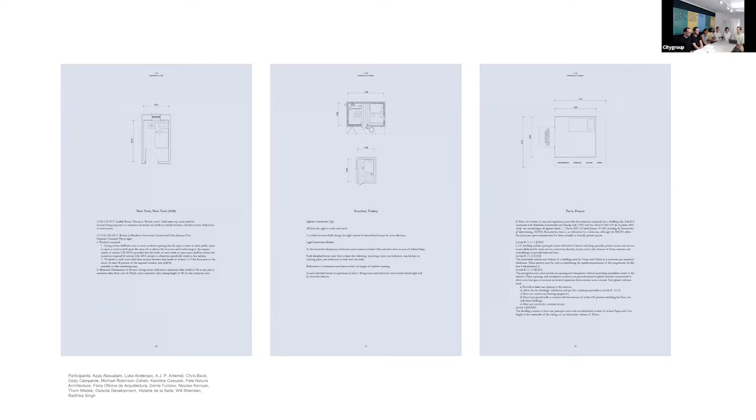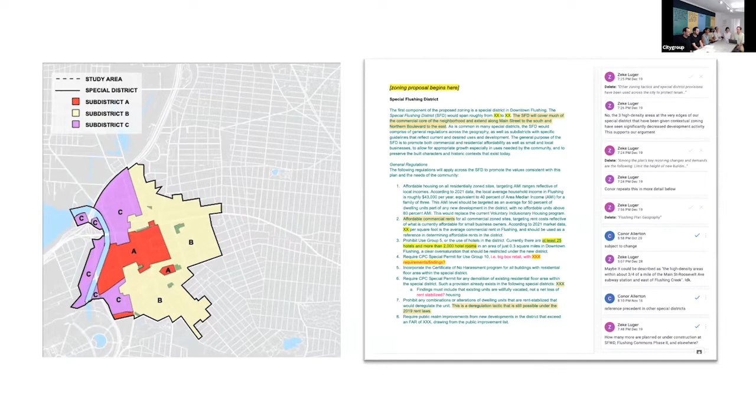The city can change the city's rules. So the question is: is the city an administrative apparatus, or is the city its mobilized residents? In an attempt to discourage speculative luxury development in Flushing, Queens, Citygroup is helping local organizations develop a rezoning plan, relying on contextual zoning to allow growth, increase affordable housing, retain manufacturing, and maintain the diversity of the neighborhood.

A city is where people draw close together for mutual defense and mutual aid. This sentiment underlies the Citygroup tradition of Circolo, a standing weekly meetup that takes place in our space or online during the pandemic. Open to anyone, Circolos are an evening to gather informally, eat dumplings from neighborhood establishments, and relax together, building up a network of conviviality and solidarity.

And in the spirit of solidarity, we organized a zoning teach-in as part of our advocacy for a community-led rezoning plan in Chinatown, where activists, residents, and politicians gather to discuss the alternative zoning proposal for a site where a luxury residential tower is currently under construction. An alternative sign was posted to the ubiquitous green fence to demonstrate the type of development that the community wants.

A city is a place for trading information quickly. Our bulletin extends the collective space beyond its interior and onto the street to engage with the public. Artists reflect on the Citygroup Manifesto and respond to the themes of the exhibition's inside by designing a piece to fit in the poster frame outside.

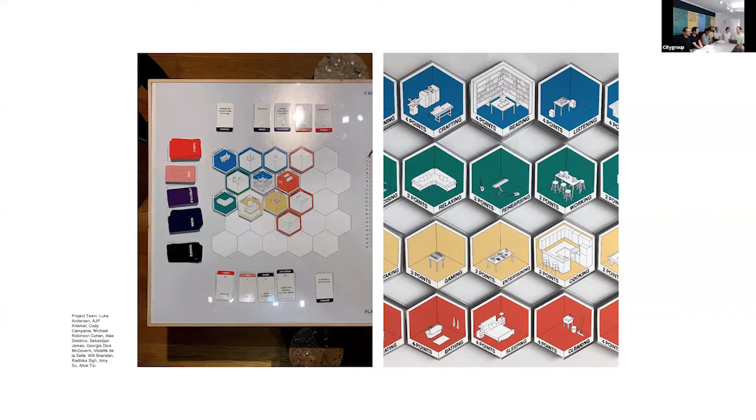A city is a collective experience where life is affected by others. The city is a space of negotiation. This is something we considered when creating a board game we exhibited at the Oslo Architecture Triennale in 2019, where two players negotiate a shared living arrangement. Considering its advantages and drawbacks, they work out the calculus to create a place for each to call home.

This collective negotiation also undergirds how we work together. Even making this lecture was a group discussion, an opportunity for us to collaborate on fonts and colors, but also the weightier questions we're posing to you all today.

The ground of the city is accessible to all. It is public. Public space creates places for people to meet and to assemble. This bench, based on the tete-a-tete or conversation chair, allows adjacent sitters to face opposite directions and converse. The form of this amenity aims to amplify discourse between city dwellers and to fortify the publicness of public space.

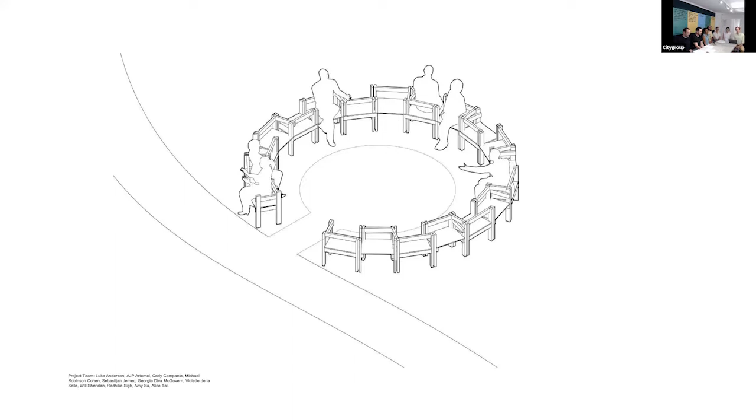Difference thrives in the city. Protecting economic and cultural differences in communities that are threatened by the monoculture of luxury development is why we are active members of the Chinatown Working Group, a coalition of organizations advocating for a community-led rezoning plan for Chinatown and the Lower East Side.

As part of the Chinatown Working Group, we created a series of analytic drawings and maps to identify sites that are vulnerable to overdevelopment and visualize the impact that both the current and community proposed zoning regulations would have on them.

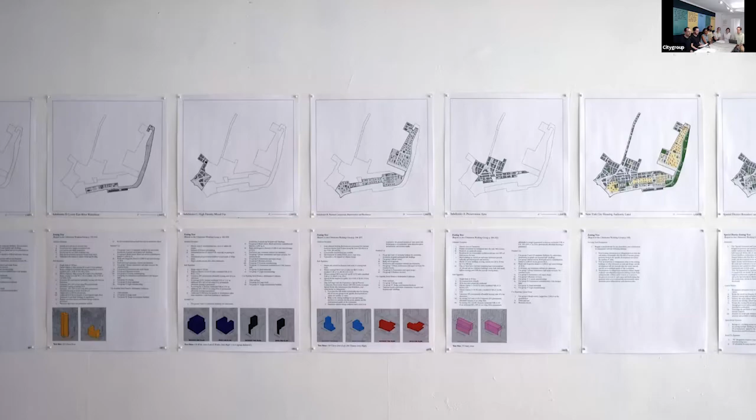For the exhibition Plan Unplanned, Ideas for an Affordable Chinatown, we invited architects and artists to make design proposals for a number of these sites to further explore the positive impact passing the community-led zoning would have on the neighborhood. This material was then used by the Chinatown Working Group and City Councilman Christopher Marte in their advocacy for zoning reform.

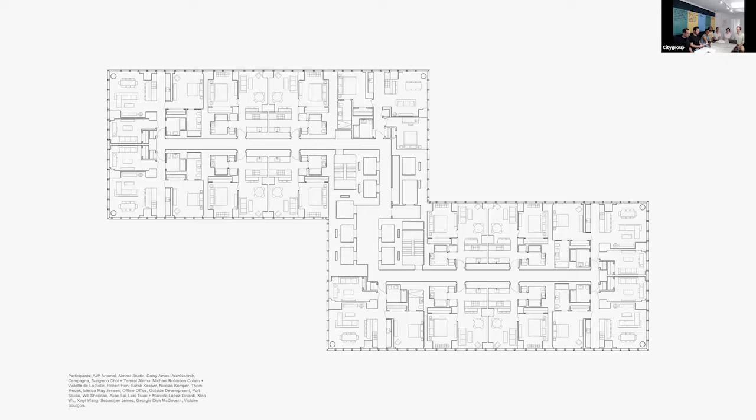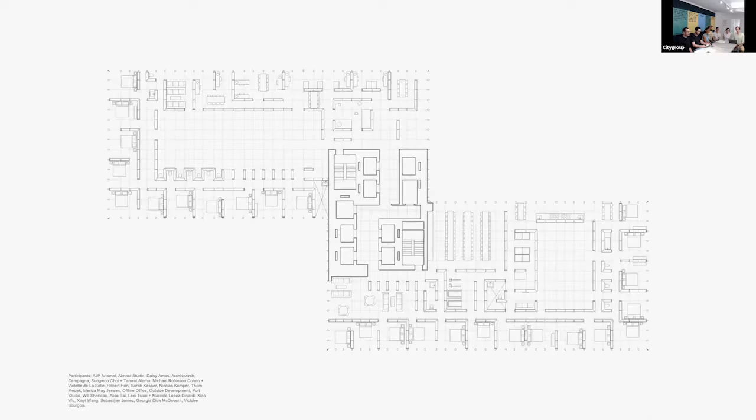Site 5 of the World Trade Center is the one parcel of the master plan left undeveloped, 20 years after 9/11, and it is the only site that will contain any residential units.

In strong opposition to the creation of taxpayer-financed luxury housing, and in support of the Coalition for a 100% affordable 5 World Trade Center, we worked with the New York Review of Architecture to invite designers to imagine an alternative, fully affordable vision for 5 World Trade Center. Given that this is publicly owned land and that we are experiencing the severe lack of affordable housing in downtown Manhattan, we view this effort as a crucial political and symbolic gesture.

And now we would like to conclude with our most recent project called Off the Fence. This is the project that we created for the Architectural League Prize 2022 exhibition. You can view this project and installation on the League website, and we've also recreated a fragment of this project behind us, as you can see in the space.

We feel that the two definitions of the city, the CITY and the CITI, come into close contact in this project.

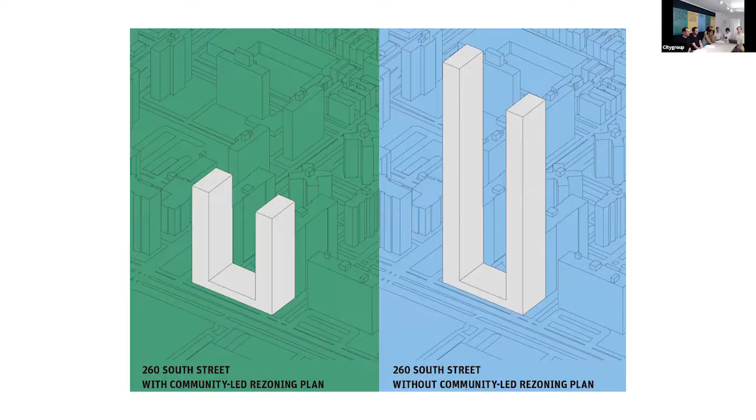Upon hearing about the construction of another luxury super tall tower on the Lower East Side's waterfront, neighborhood organizations held a walking tour to call attention to the imminent threat to the community. During this tour, we collected quotes from the attendees and from various media sources reporting on the issue. We then created multicolored posters with a selection of the quotes we had collected.

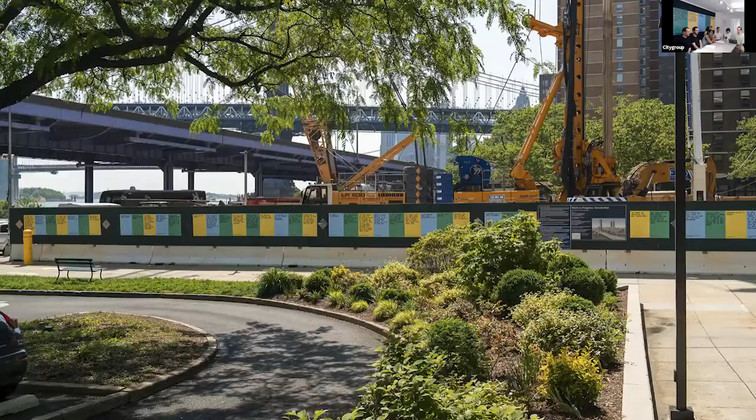The posters were then installed on the green construction fence that surrounds the site of the future tower. The posters manifest a discourse across their expanse and offer an opportunity to discuss what is possible for the future of the neighborhood.

A bench was an integral part of this installation, providing a vantage point from which to take in this text-based discussion, also offering the opportunity to strike up a conversation about it with a fellow onlooker.

But the posters were soon painted over by the developers who control the site. However, the posters and the quotes could not be fully erased.

The CITY can never be fully suppressed by the CITI. Ultimately, we see our work as a group, as architects and artists, as nourishing and fortifying the pockets of dissidence where the city with a Y pushes back against the city with an I.

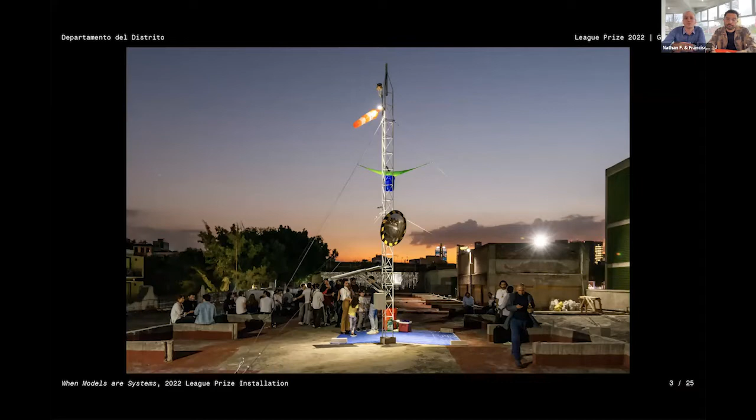For us, this really meant working with an exterior condition that was in constant flux, and importantly allowing us to engage with the politics of natural resource management and energy production in Mexico.

The rooftop as site was also of interest to us, particularly in relationship to the theme of grounding. It's a place where anonymous city infrastructures are located in elevated, unobstructed positions that facilitate our daily routines and connect us on the ground. So we documented communication towers throughout the city, fitted with electronic devices, transmitters, receivers, and power sources, and worked to reformulate these components toward a different end.

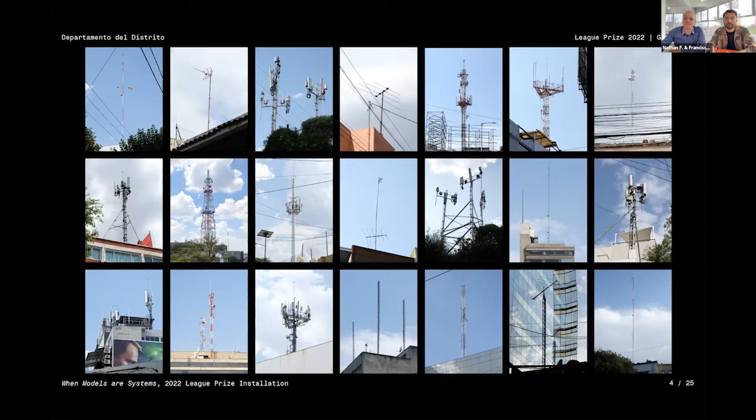So our tower plays host to an assemblage of devices that collectively measure, channel, and ultimately generate an exterior environment. Attached to a 7-meter tall tubular steel structure at varying heights, these devices ground electrical currents, measure humidity, collect rainwater, monitor wind flows, reflect light, and produce solar energy.

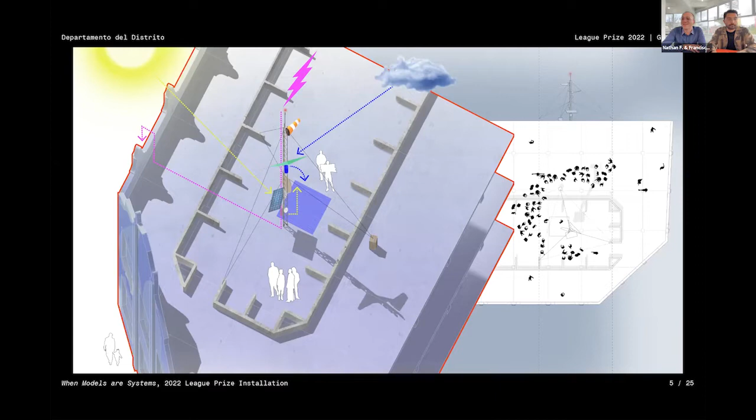This energy, in turn, powers integrated spotlights that illuminate the surrounding roof deck, loudspeakers synced to a playlist that's also featured on our installation page, and misters that cool the air, a temporal space where gathering is produced. Here we have some pictures from the installation, from the opening event.

So really what the installation is doing is plugging into existing social, environmental, and built systems on site. And so the installation is grounded to its context, both physically and operationally.

Taking advantage of the rainy season in Mexico City, which spans late May through November, the project is dependent on the periods of intense morning sunshine and afternoon thunderstorms that are typical during these months.

And in that way, when models are systems, it makes visible both the precarity and potential of Mexico's natural environment, which at the present moment is really being threatened by a renewed federal focus on hydrocarbon industries throughout the country.

And for us, this interest in systems stems directly from an approach to design that's based in program, in operation, in the construction of relationships, and in the ability to literally provide an abstract model or machine for future practice.

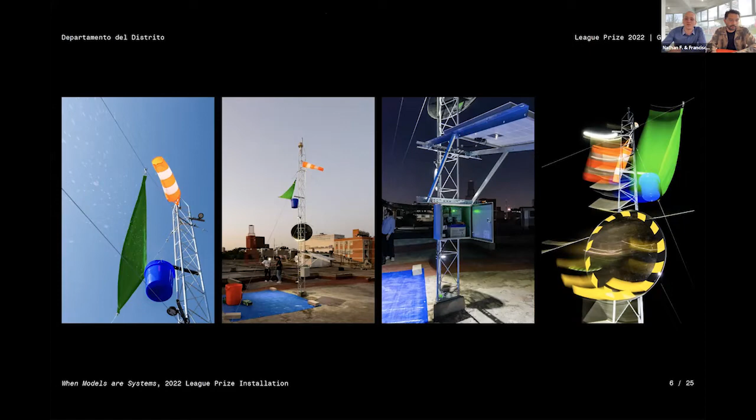We'll shift now to a research and exhibition project that we developed for the last Chicago Architecture Biennial, which looks at the current status of architectural and urban projects constructed during the so-called Milagro Mexicano, or Mexican Miracle, in Mexico City. Today, many of these projects, and there are hundreds that we've cataloged, stand at a turning point.

Architecture from the 20th century in Mexico is largely unprotected by federal preservation law, and many of them will either be demolished or renovated in the coming decade, based on the whims of private owners and developers.

This project seeks to generate a public conversation around the future of these sites and asks, what value do they hold for our current society?

Though, as we added to this list, we quickly realized that the format was insufficient to represent the sheer quantity of sites in question.

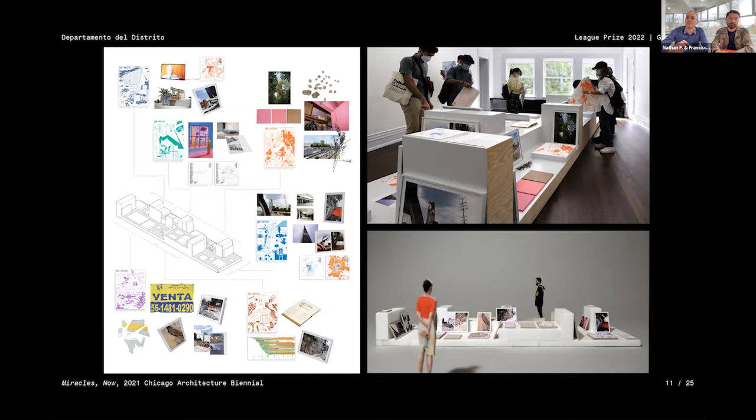The installation is structured around 6 case studies, with material grouped and organized on a long podium that sits at the center of a gallery space at the Graham Foundation. We made a conscious decision to not include any archival content, and instead, it was important to show the current state of these projects through different media: photography, text, video, and found objects. And in that way, it became a project with quite blurry boundaries when it comes to authorship and also the traditional role of the architect.

We have an installation image where you can clearly see the mix of content. We commissioned photographer Adriana Hamoy for the photographs and artist Irina Shabanova for the illustrations, for the broadsheet publications, one for each of the 6 case studies, which also contains an interview on the opposite side, and they're free for takeaway by exhibition visitors.

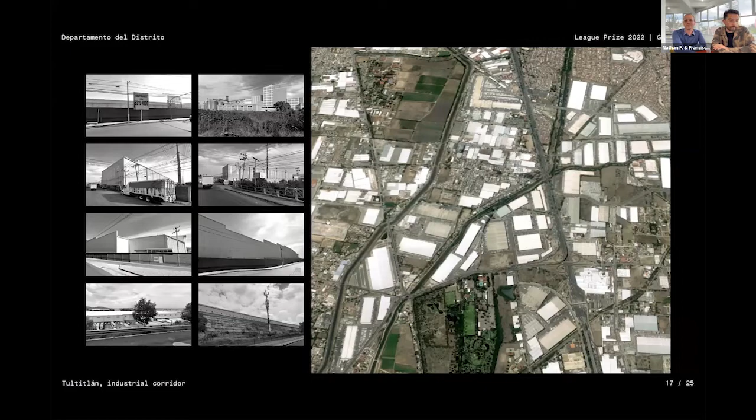From these contemporary industrial references found directly in the area, encompassing local materials, building practices, and forms, we generated a basic system that could be replicated across the 5 projects, making them part of a family, but with a flexibility to allow each one to respond appropriately to its unique site and program.

These are recent images taken last week of the projects under construction. The programs include a municipal market, a house of culture, a park and sports center, a fire station, and an agora that contains an auditorium and library.

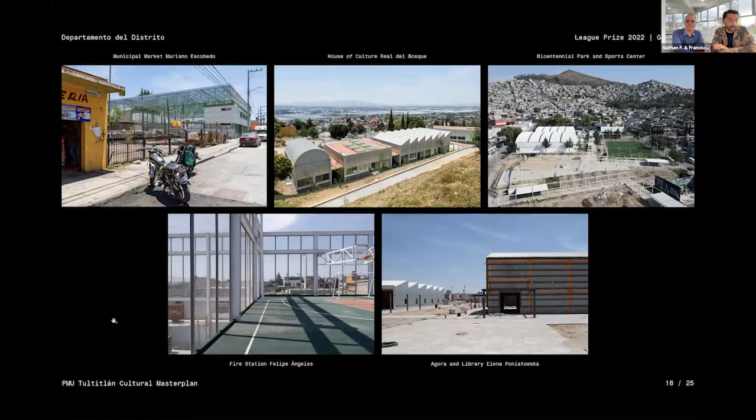For its size and complexity, the agora and library, Elena Poniatowska, was literally the biggest challenge out of the 5 projects. Sitting within a mega block in a residential area, it holds a number of public programs such as public middle school, National Guard headquarters, daycare, and women's center.

The block was a barrier between the residential neighborhoods on the south and a commercial strip on the north. Addressing this issue, we opened up the site for pedestrian use, creating a linear public space that would serve as the access point for all 3 buildings, while also achieving better circulation for the adjacent programs.

The project is composed of 3 main buildings placed along the east and west borders of the site: a cultural center and music school that contains a cafeteria and gallery, a library that contains an auditorium and children's daycare center, and finally, a medical center that contains administrative offices. We embraced a mat building typology

where a series of large courtyards break up otherwise simple rectilinear volumes, and connections are facilitated by pergolas that provide cover from intense sun.

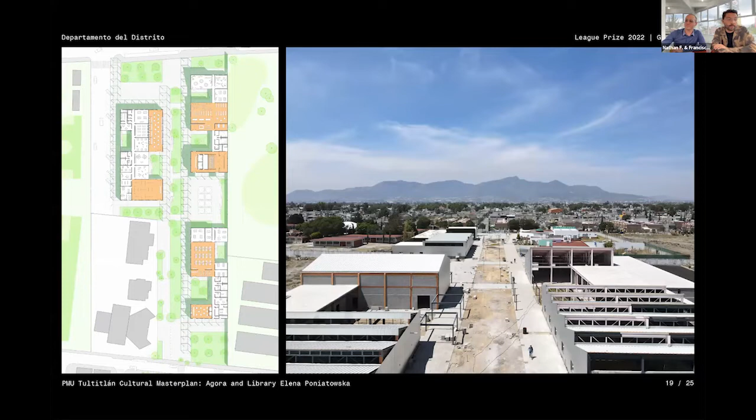The construction method is extremely simple and again, something that you find all over Tultitlán, which is a steel frame structure infilled with concrete block. In our specific case, a steel cladding or steel corrugated sheeting was added as cladding.

Color was also integrated as a wayfinding device for such a massive project and scale. It was important to facilitate the navigation of this project in some way, so the structure of each of the three main buildings is painted differently. Here we have the Music and School and Cultural Center, where the structure is painted a pale pink.

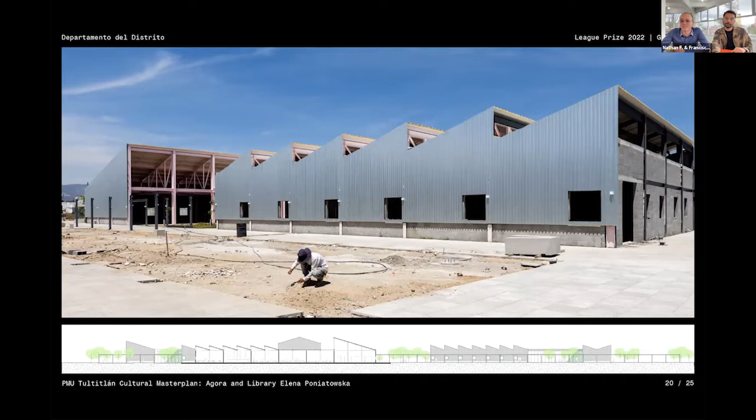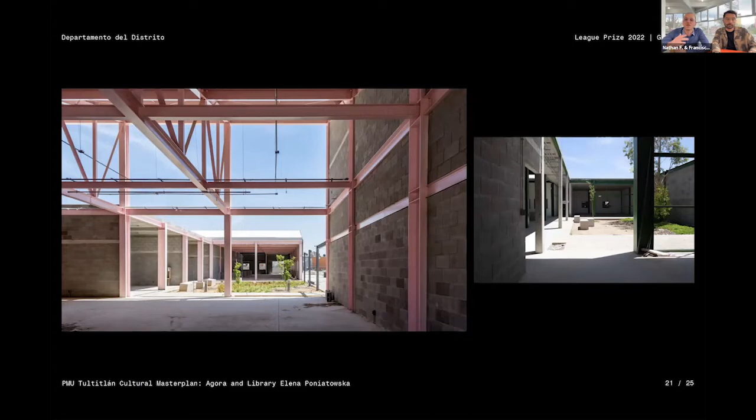We integrated two different courtyard typologies. Larger voids serve as main building entrances at the central spine, such as the image on the left, which is taken inside the gallery space, looking through the entrance courtyard and into the cafeteria. Then smaller voids situated within the building interior bring in natural light and provide protected exterior spaces, such as the image on the right, which is part of the library.

Community engagement was and continues to be an important part of the design process throughout the development of the master plan. We pushed for some quite unconventional pairings, such as in this particular project, which combines a fire station and small medical center with a public plaza. The argument here is that the activities and personnel of the fire station, who are there 24/7, anchor the public plaza and provide a clearly defined public space within a neighborhood where security and safety are serious concerns.

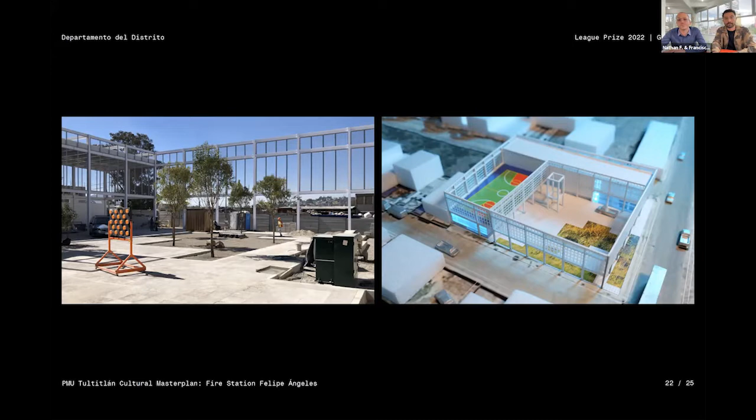We also pushed for the inclusion of an elevated outdoor basketball court, which satisfies part of the program brief that asks for a contained exterior space for exercise. So instead of having that on the ground floor surrounded by a fence, it's elevated, leaving most of the ground floor publicly accessible. There's also the idea that this elevated court may be utilized by the surrounding neighborhood at special moments during the year and accessed through the central tower.

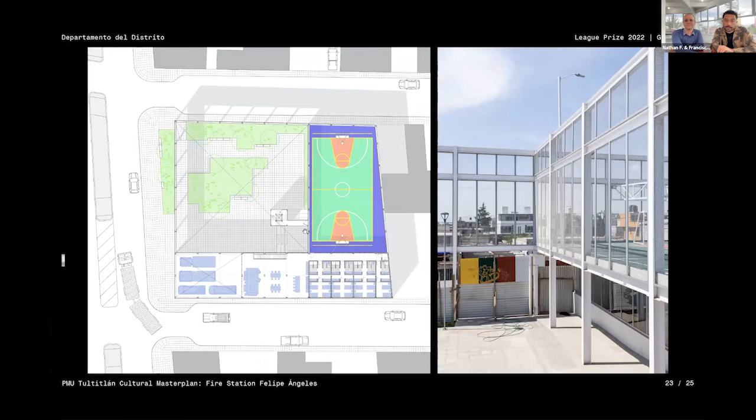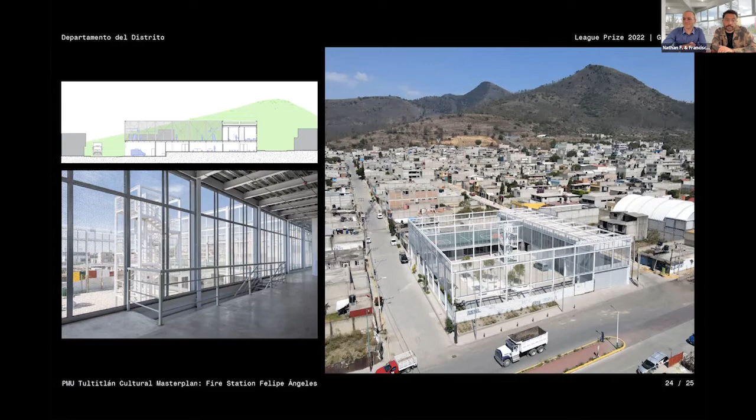In this section of Tultitlán, there are no shaded public parks, so our ambition was to create a space that would eventually be adopted and activated by the neighborhood.

So in closing, we'd like to reiterate two driving motivations for our work, and also close with an image from our League Prize installation. The first is the belief that design has the ability to embed everyday actions and elements, however small, with power and potential. The second is an approach to architecture based in program, systems, operation, and the construction of new relationships that may provide a model for how we inhabit the world.

Thank you very much. Thank you.

That was fantastic, really, really wonderful presentations. Thank you both, and congratulations again. It was great for you to share your work with us. I'm really excited about this chance to discuss your work with you.